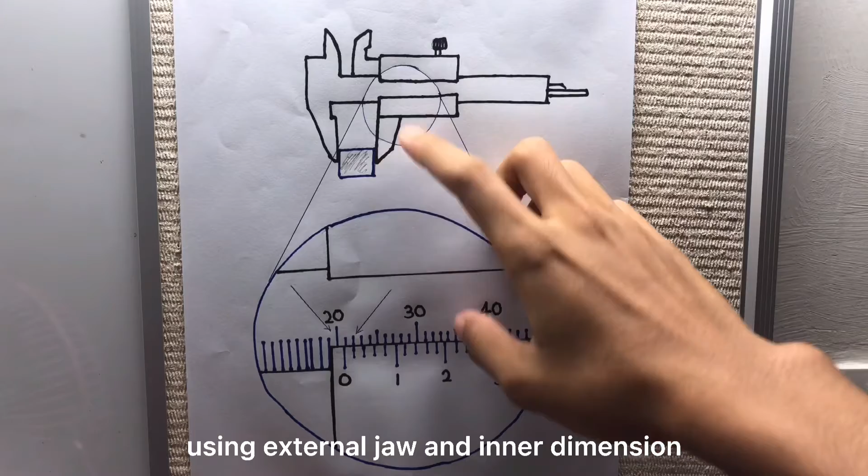I will proceed to question 1 first. This is a vernier caliper. Its function is used to measure the outer dimension of an object using the external jaw, inside dimension using the internal jaw, and depth using the depth measuring blade.

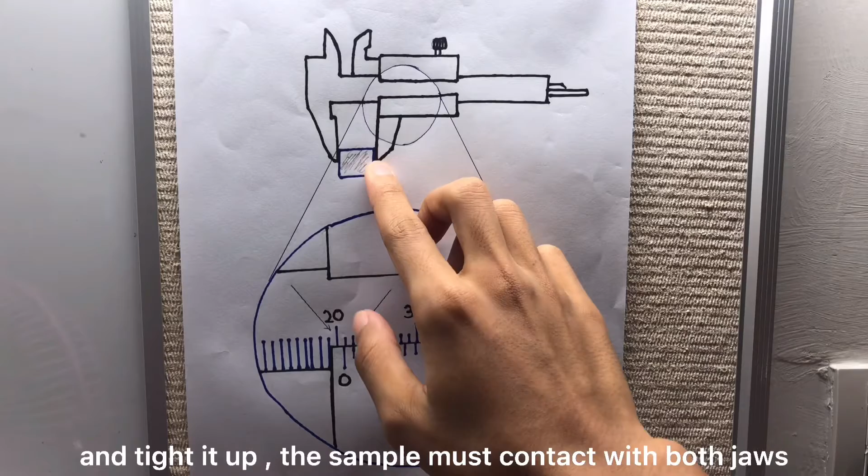I will teach you how to use the vernier scale. First, you must open the jaw and put your sample between the jaws, making sure the sample contacts both jaws, then don't forget to tighten the thumb screw.

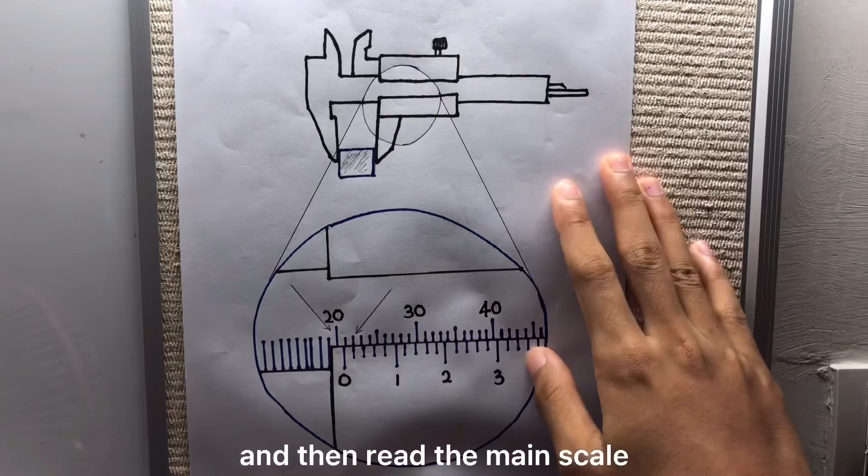Next you must read the main scale. How to read the main scale is you must read the value before the reading touches the zero from the vernier scale. As you can see here, the reading for the main scale is 20, because 20 doesn't go over the zero from the vernier scale.

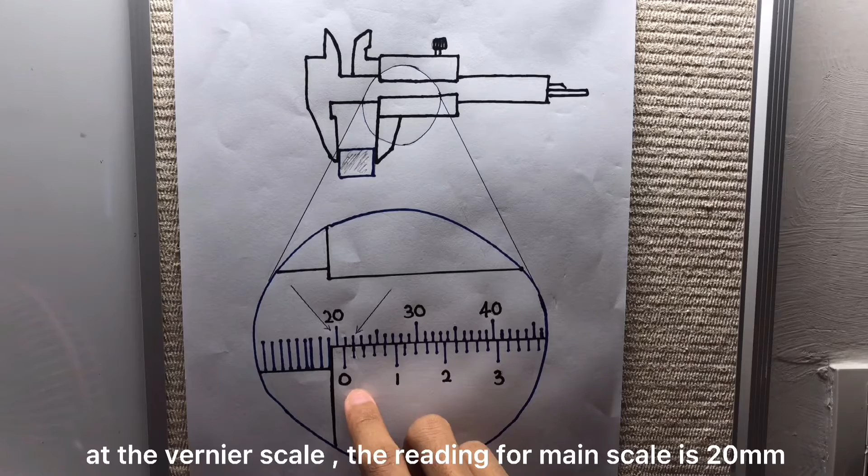The reading for the main scale is 20, and then for the vernier scale, you must find where the line from the vernier scale is perpendicular with the line from the main scale. As you can see here, the line is here. The smallest reading of the vernier scale is 0.02 millimeters, so this reading is 0.02 millimeters.

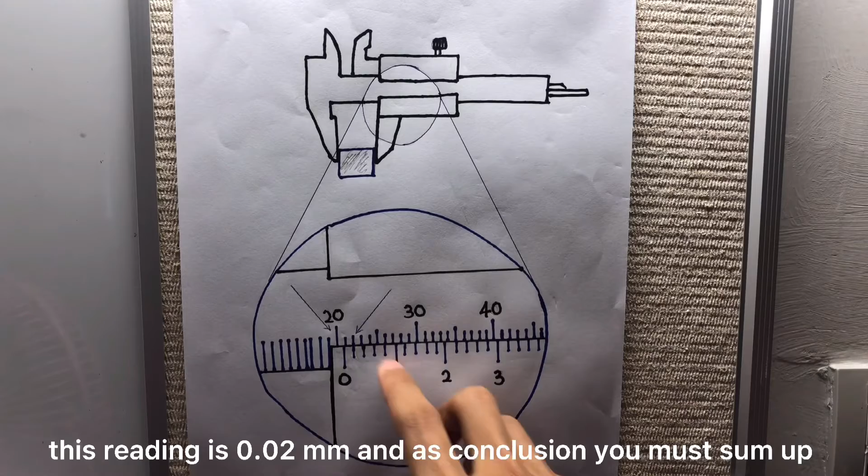In conclusion, you must sum up the reading from the main scale with the reading from the vernier scale. Then you get the actual reading for the sample, which is 20.02 millimeters.

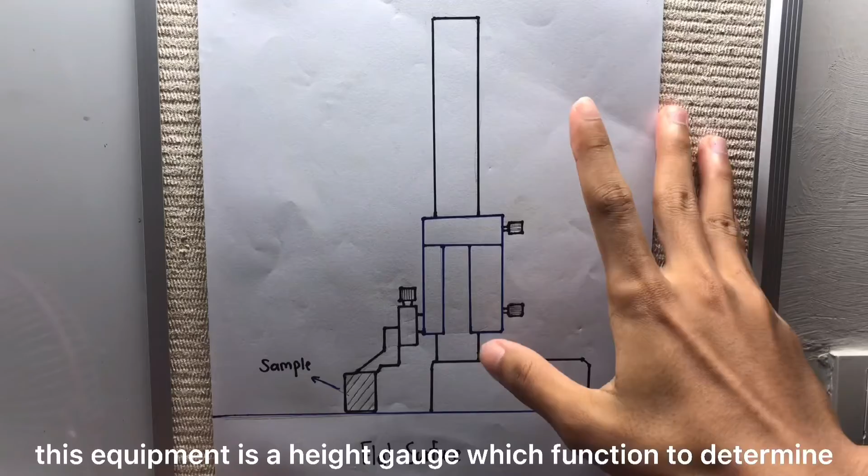This equipment is a height gauge. The function of the height gauge is to determine the height of an object and for marking of an item to be worked on. Usually this item must be used on a flat surface, such as a granite surface.

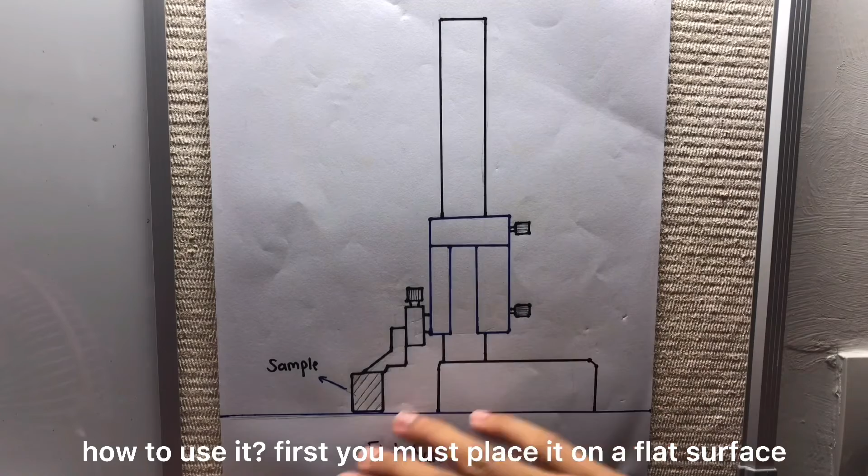How to use it? First, you must place it on a flat surface, then loosen the adjustment clamp. You push this over, then put your sample under the measuring jaw, and push it down.

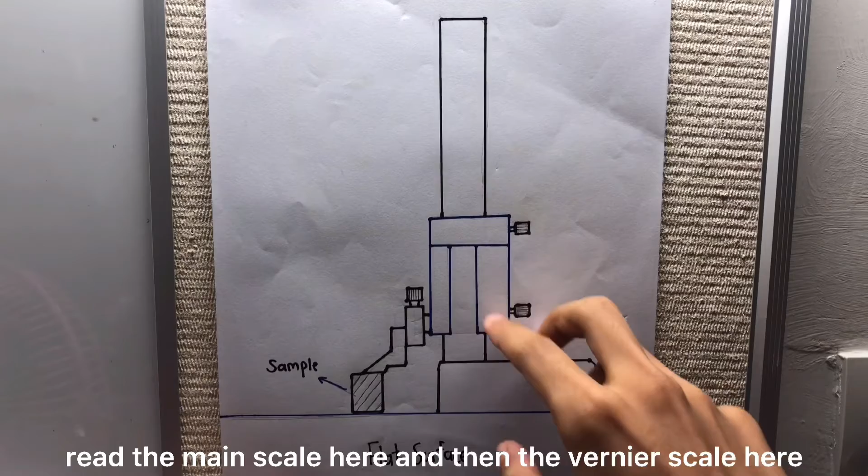To read the reading, you must first read the main scale here, and then read the vernier scale here. In conclusion, you must sum up the reading from the main scale with the vernier scale to get the correct reading for the sample.

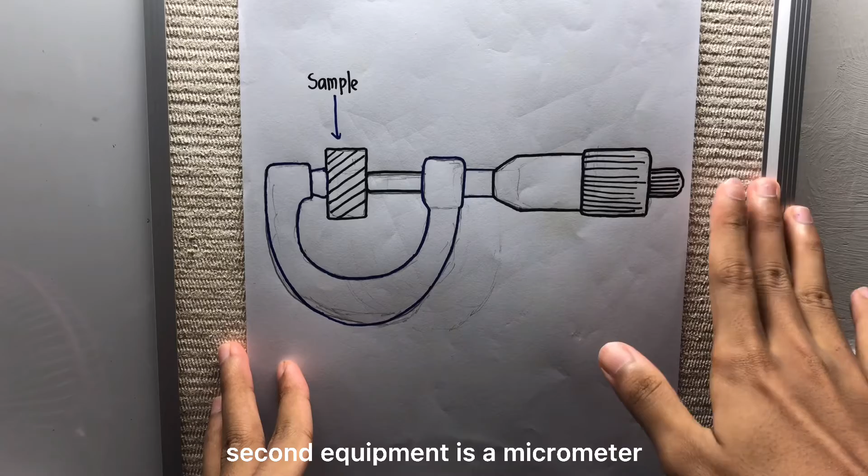The second equipment is a micrometer. The function of the micrometer is used to measure precise measurements of a very small object, and it can also measure the depth, length, and thickness of the object.

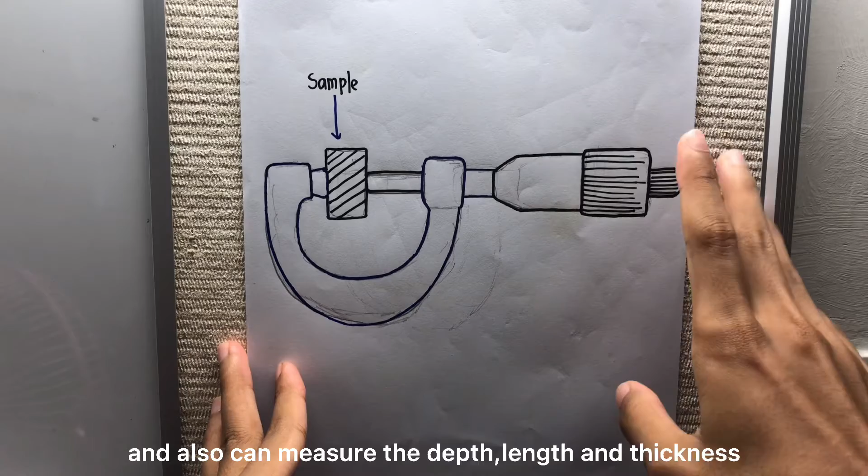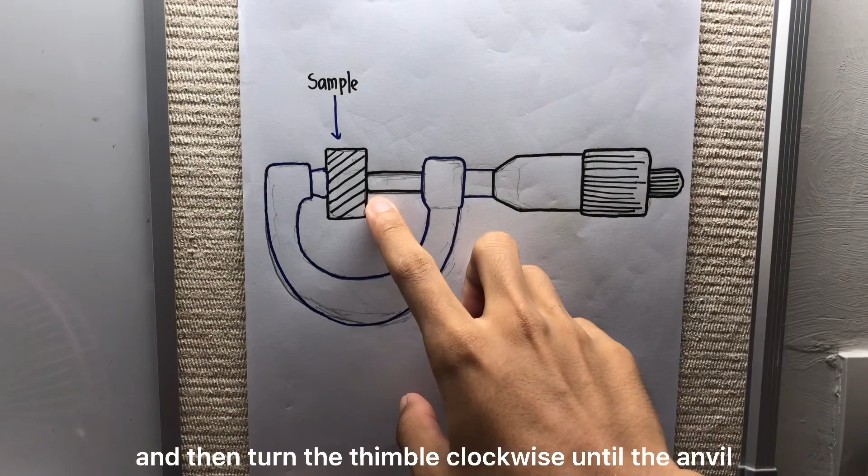How to use this micrometer? First, you must unlock the clamp and turn the thimble to open the micrometer. Put your sample between the anvil and the spindle, then turn clockwise until the anvil and spindle touch the sample.

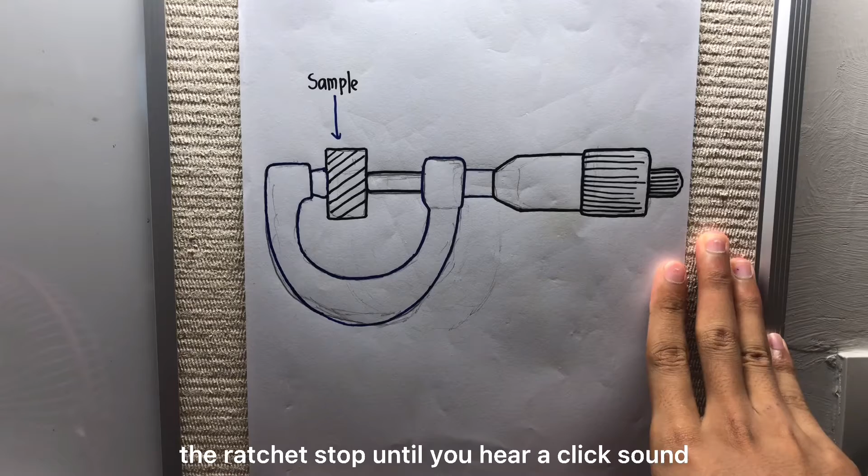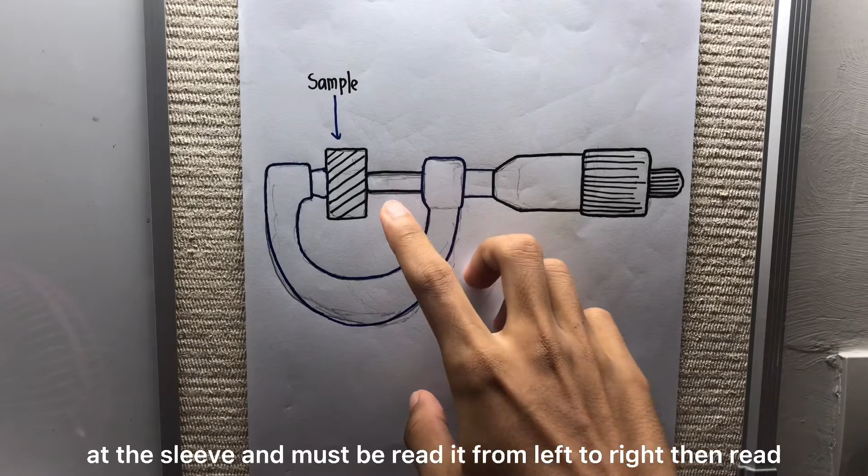Then you must turn the ratchet stop until you hear a click sound. To read this micrometer, you must read the scale at the sleeve, reading from left to right, and then read the scale at the thimble, reading from bottom to top.

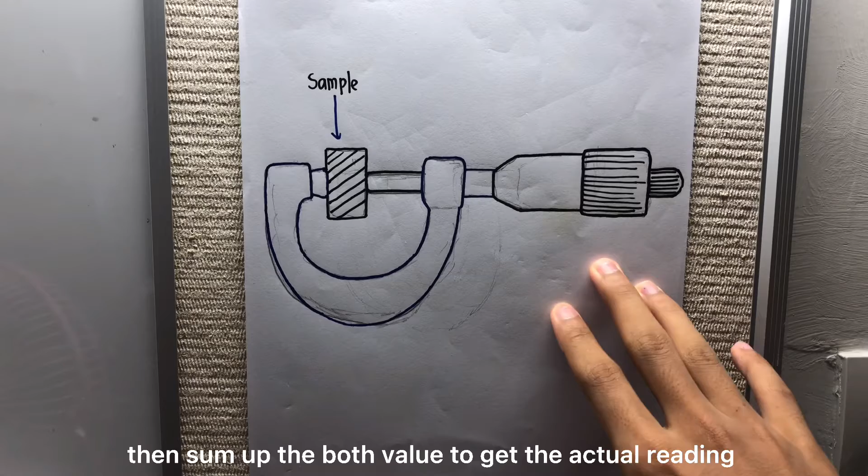Then sum up both readings, and you can get your reading for this sample.

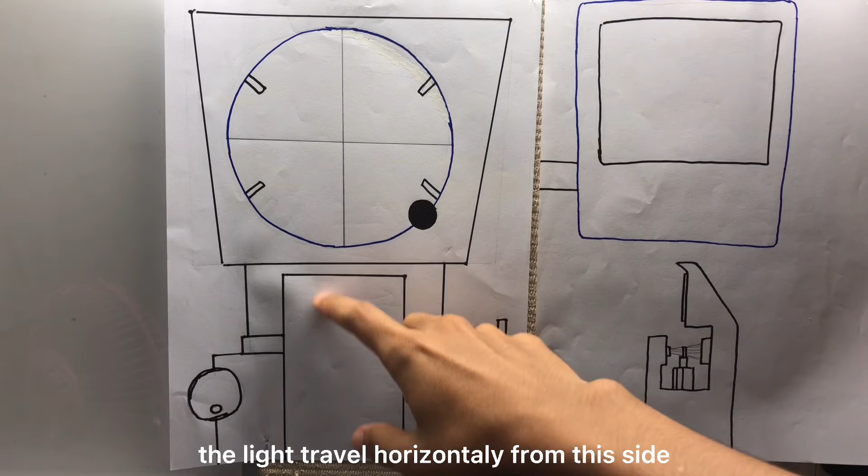The function of the horizontal optical comparator is used to inspect and measure the dimension of very small manufactured parts. The light travels horizontally from this side to the machine. The digital readout for this horizontal optical comparator is on the side, where you can see the reading for the x-axis and y-axis. You can also reset the reading to zero for both axes.

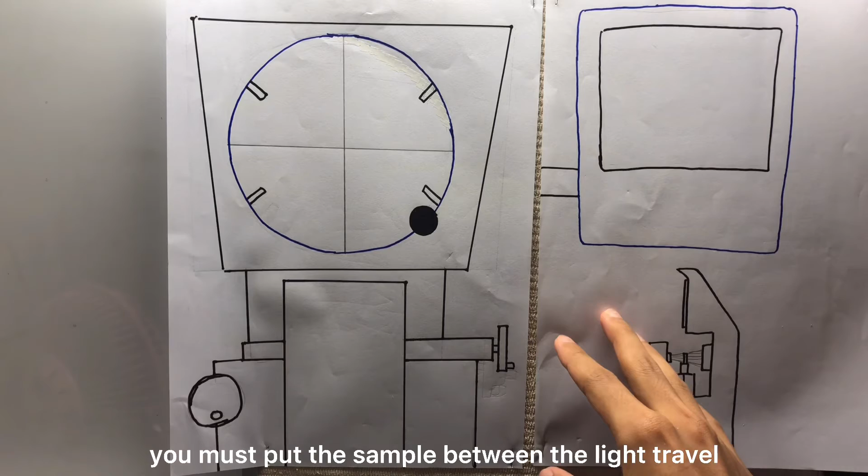To use it, you must put the sample between the lights, so you will read the shadow formed on this screen. This line is a guideline to start reading your sample.

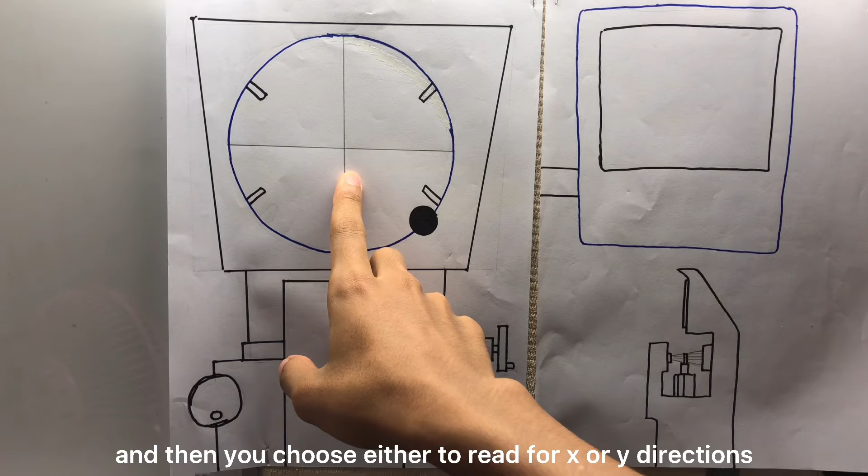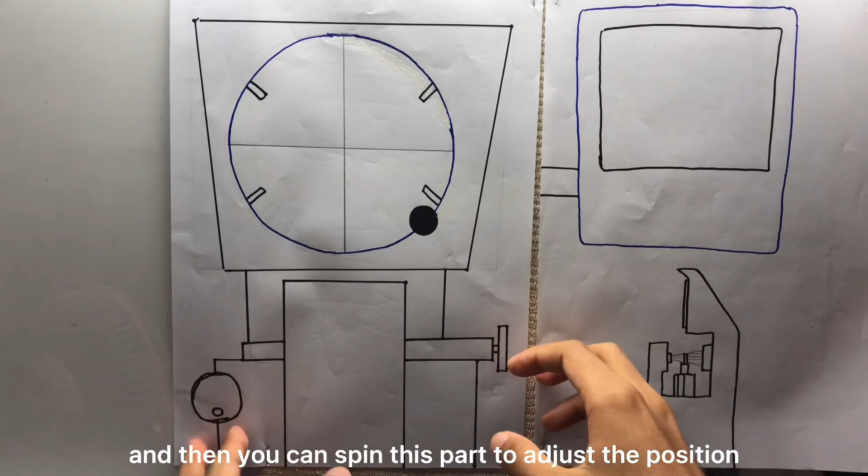First, the sample must be aligned with this line, then you choose whether you want to read the x or y direction. You can spin this part to adjust the position of the sample, for x-axis and for y-axis.

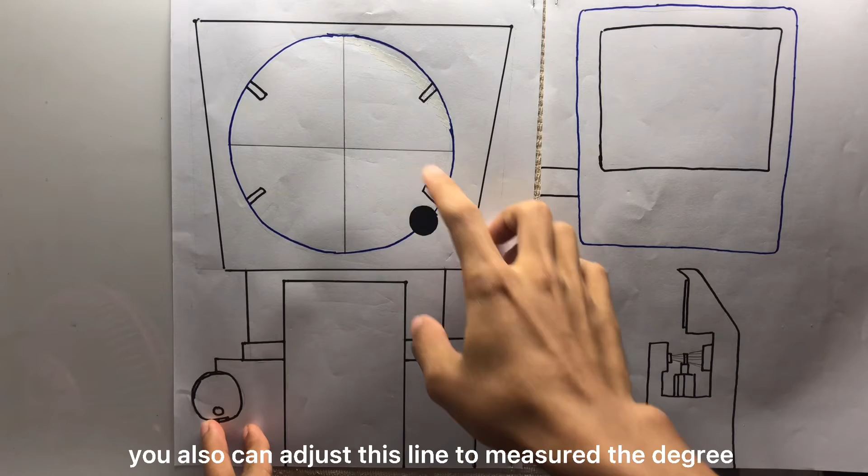You can also adjust this line to measure the degree of your sample, which can be shown on this digital readout. This is the side view where you put your sample between the light's travel path.

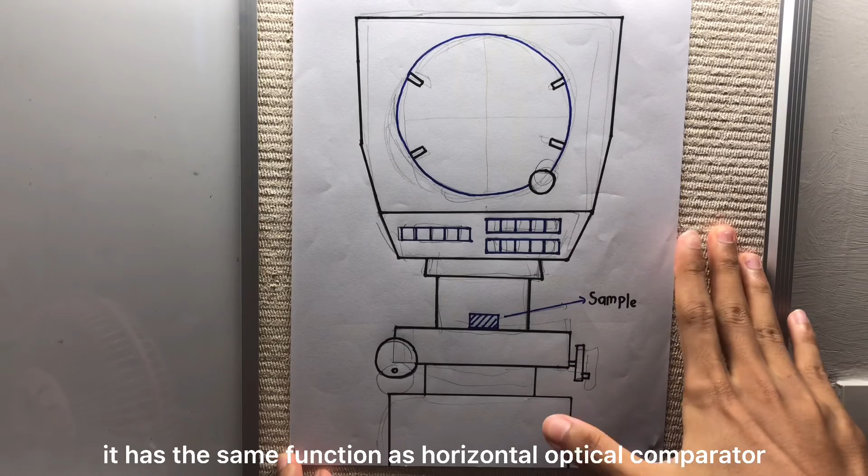This is a vertical optical comparator. It has the same function as the horizontal optical comparator, but the difference is the light travels vertically from up to below, through your sample.

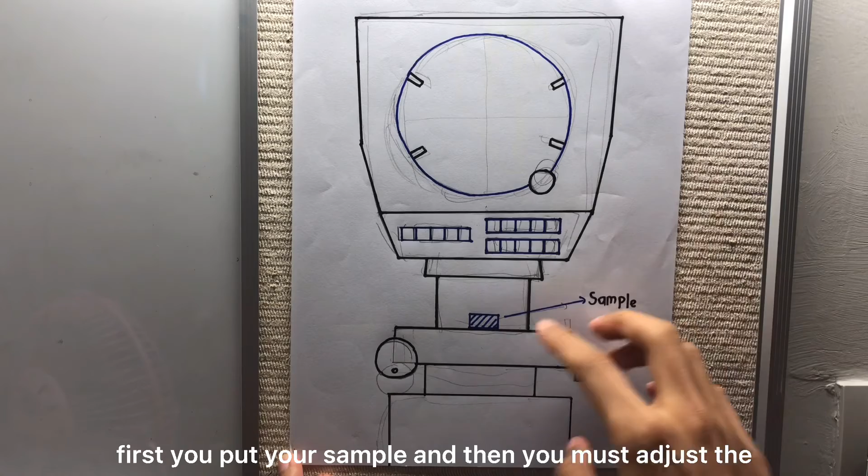First, you must put your sample, then you can adjust the position of your sample using this spindle for the x-axis and y-axis. The reading will be shown here.

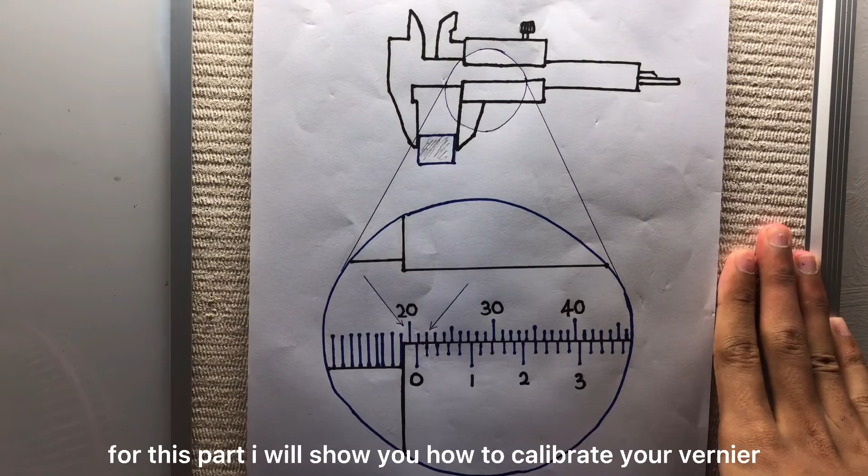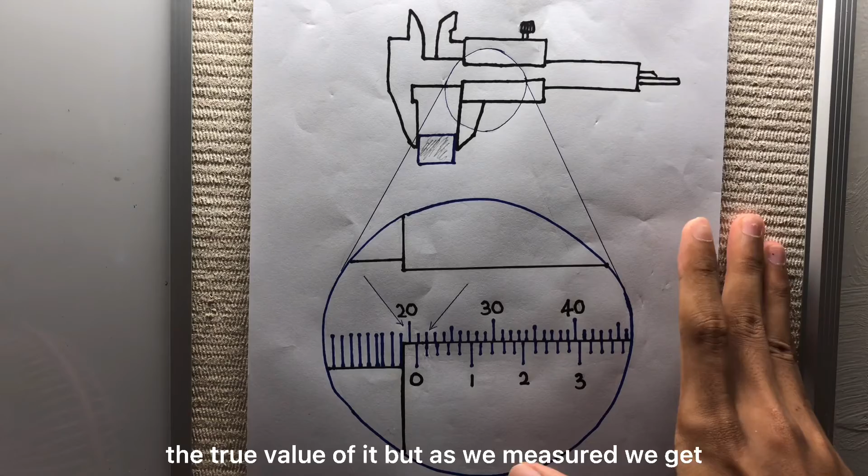For this part, I will show you how to calibrate your vernier caliper using a gauge block with a known true value. As you can see, the gauge block has a dimension of 20 millimeters as its true value, but as we measured, we got a reading of 20.02 millimeters.

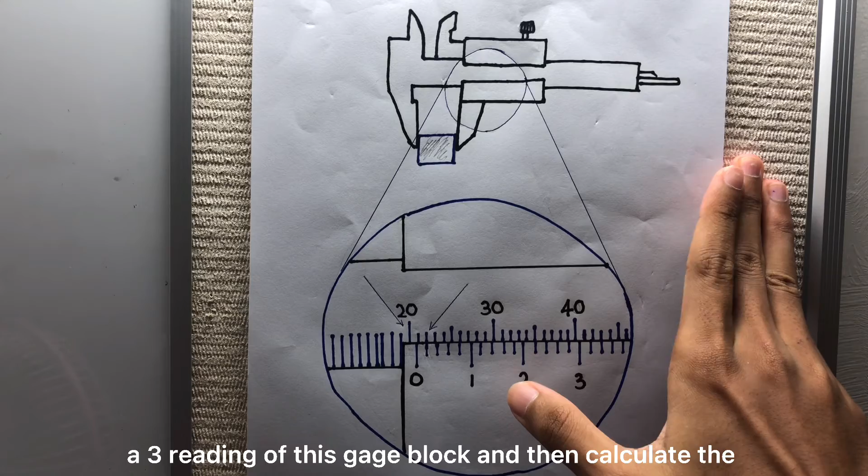To measure the percentage error, you must take at least 3 readings of this gauge block, and then calculate the average. I already got the average of 20.02 millimeters.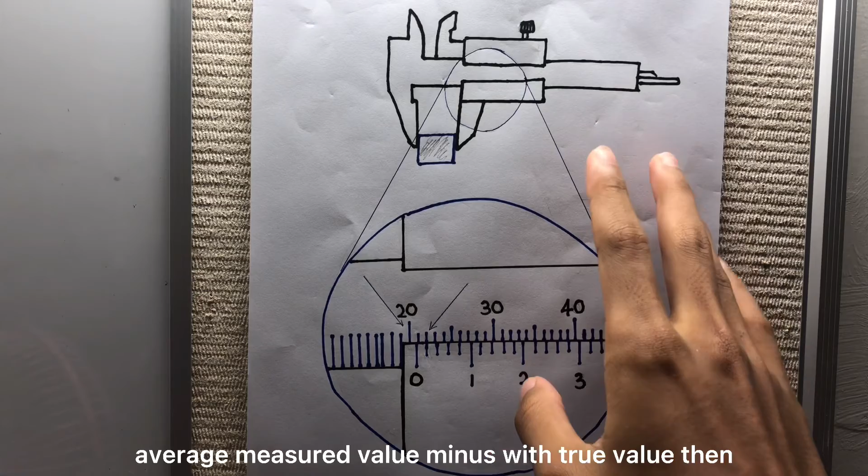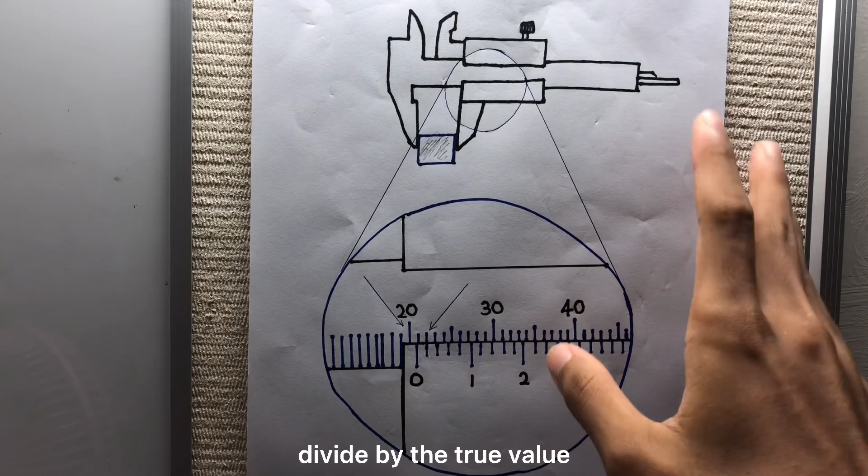To get the percentage error, you take the absolute value of the average measured value, 20.2, minus the true value of this gauge block, which is 20 millimeters, divided by the true value, which is 20 millimeters. Take the absolute value of that, then multiply by 100 to get the percentage error.

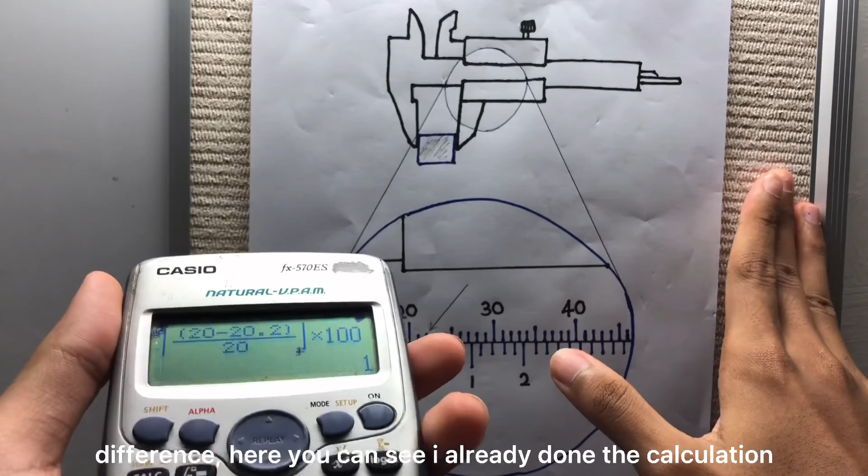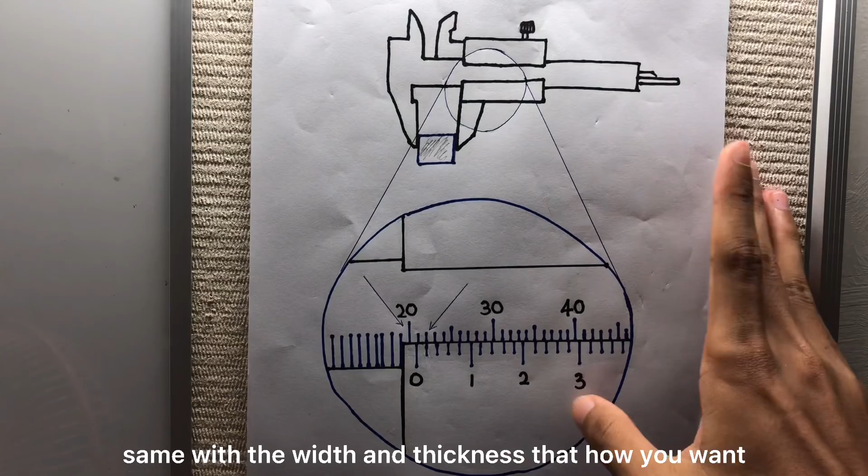Here you can see I already did the calculation, and you can get the percentage error for this length, which is 1%. The same applies for the width and thickness. That's how you calibrate this vernier caliper.

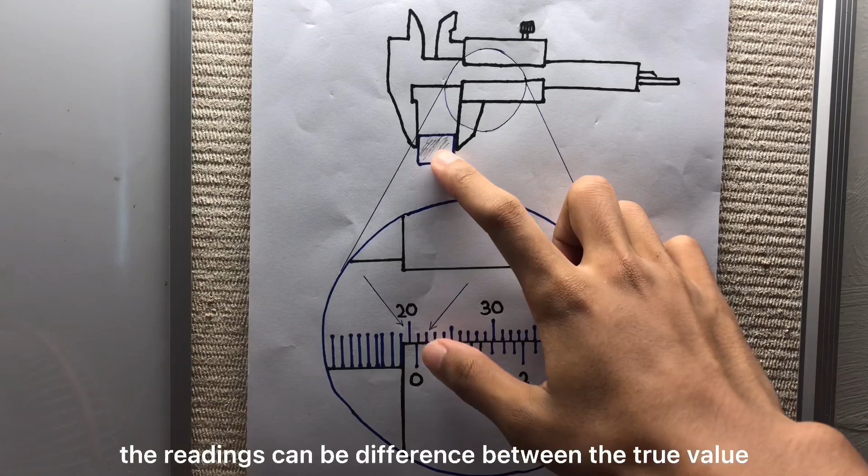As you can see, the readings can differ between the true value of this gauge block and the measured value of the sample.